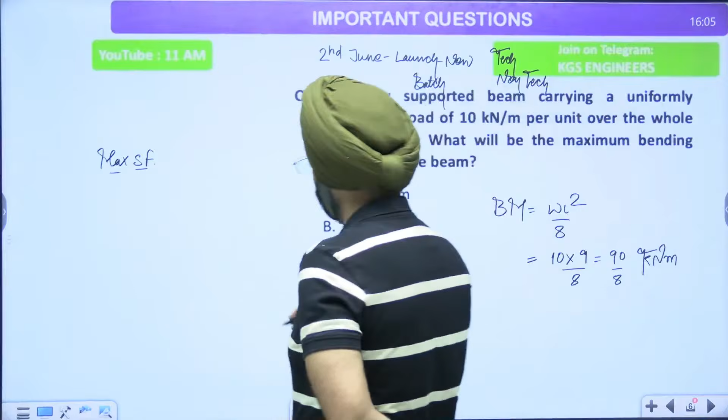Now the maximum shear force for this case will be WL by 2. So W is 10, L is 3, by 2. So this value is 15 kilonewton.

What will be the Euler buckling load of a column when it is fixed at one end and the other end is free? The main thing is effective length - when one end is fixed and other is free, it is 2L. So Euler's load will be pi square EI upon 4L square.

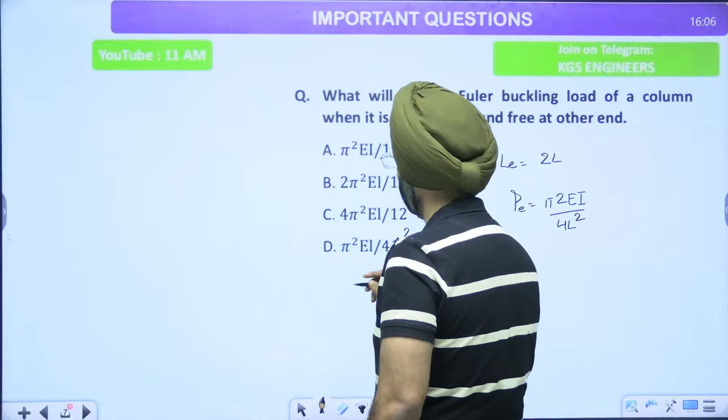These are all L square. Okay, can anyone give me the value of Rankine's constant? Small a, this equals to sigma c divided by what? Can anyone give me the value of Rankine's constant? This is sigma c divided by what?

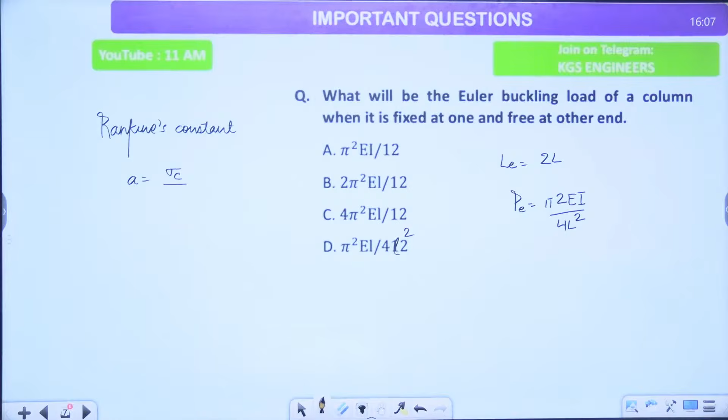This question has been asked several times in various competitive exams - Rankine's constant. Sigma c upon pi square E, nothing else.

As I can see, very few students know the answer of this question. So let me solve this for you, because this question is an important one and regularly asked in competitive exams. So 1 upon Rankine load is 1 upon PC plus 1 upon PE. So Rankine load is PC into PE, PC plus PE. So Rankine load is PCPE upon PC plus PE.

Now divide this value by PE. So this is PC upon 1 plus PC upon PE. Now PC is sigma C into A - crushing load is crushing strength into area. 1 plus sigma C into A. PE is pi square EI upon LE square.

So this is sigma C into A, 1 plus sigma C into A, pi square E. In place of I, I am writing down AK square upon LE square. Now this sigma C upon pi square E, this is Rankine's constant. So Rankine's constant is sigma C upon pi square E.

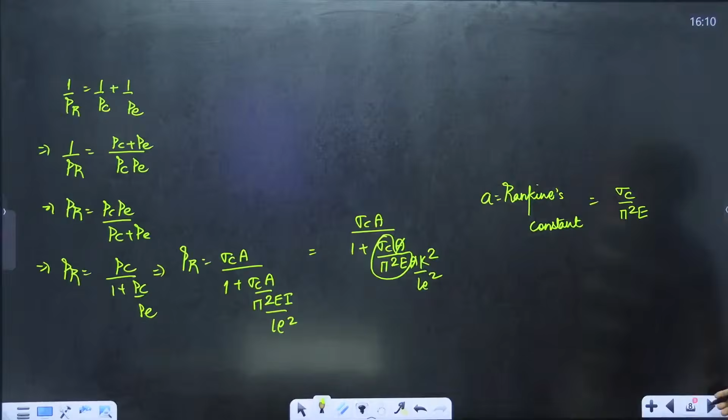Moving on to the next question, let's shuffle the questions. The depth of flow of water at a certain section of a rectangular channel 4 meters wide is 0.5. The discharge through the channel is 16 meter cube per second. If a hydraulic jump takes place on the downstream side, find the depth of flow after the jump. So they have asked you about Y2.

Very interesting question. The depth of flow is given before the jump. What is the depth of flow after the jump? Very interesting question. If you are able to solve this one, it will 100% help you.

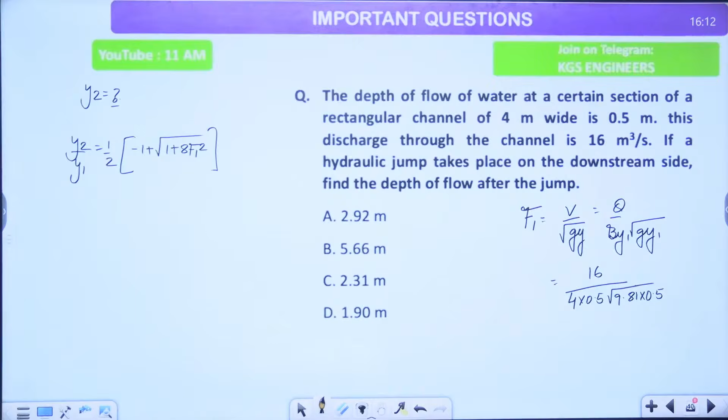So this is under root of 9.81 into 0.5, and 16 by 4 by 0.5. So the Froude number is 3.612. Now put this value here. So Y2, Y1 is 0.5, the square of this value multiplied by 8, plus 1, root of this value minus 1, divided by 2, and then multiplied by 0.5. The answer is 2.316.

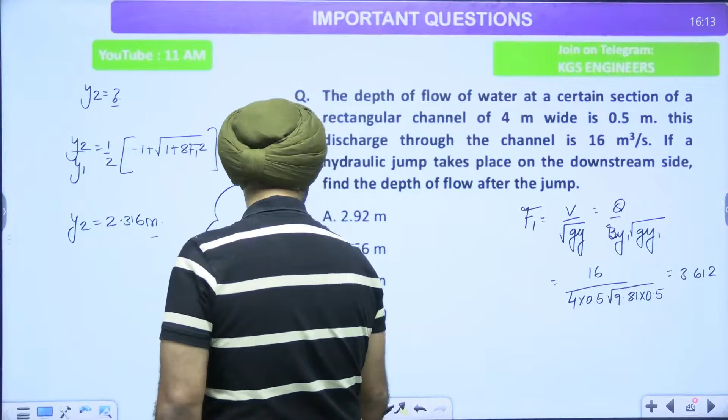Very, very, very interesting question. Definitely deserves appreciation. How was the question, kids? Liked the concept, or I should say loved the concept. A pure conceptual question.

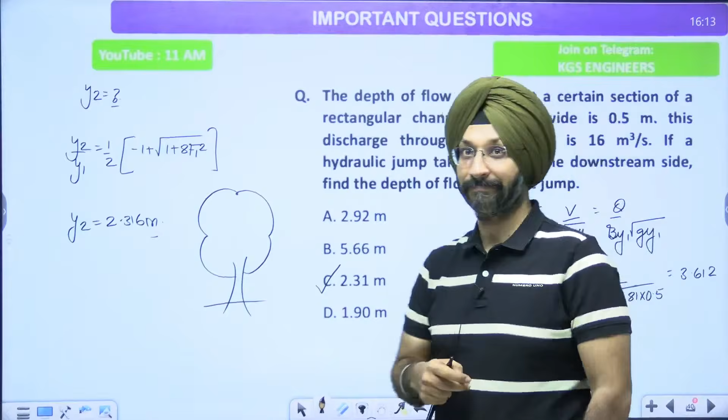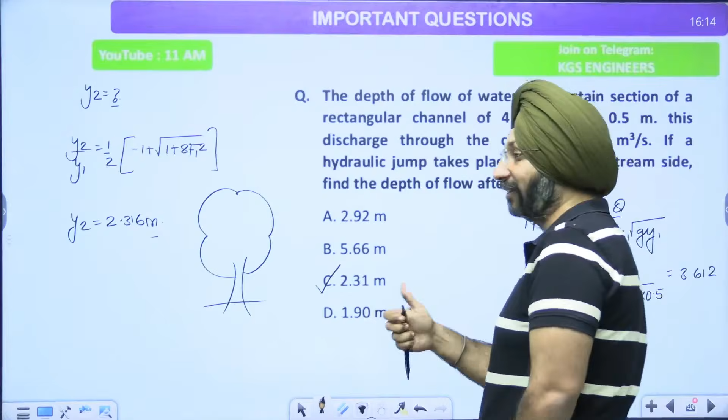The thing you should understand is that the theory of open channel flow is easy. It is among the smallest subjects. If you see the number of chapters, the number of topics in open channel flow, it is among the smallest subjects, but it can have questions as interesting as this one. So it's a very interesting subject.

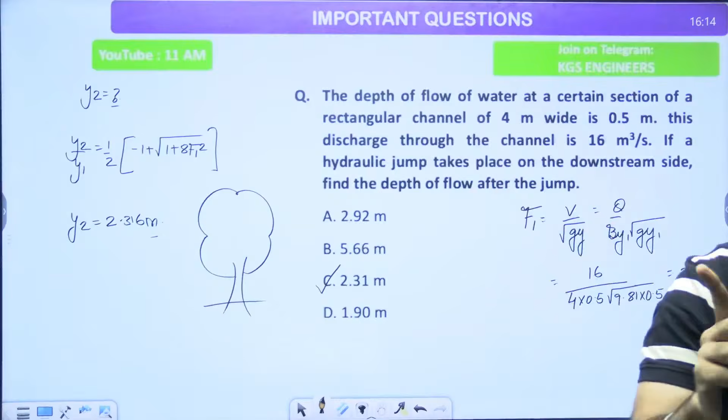We know this: in case of hydraulic jump, there are only 4 formulas. The entire hydraulic jump concept is based on 4 formulas. One I have written here. Another one is y2 minus y1 whole cube divided by 4 times y1 y2. The other one is y1 y2 into y1 plus y2 equals to 2q square upon g. So the entire topic is based on these formulas.

You must have also known that some of these formulas will be applied, but the thing is to apply them. Now how do you become better in solving numericals? It is practice. There is no other way to get better apart from practice.

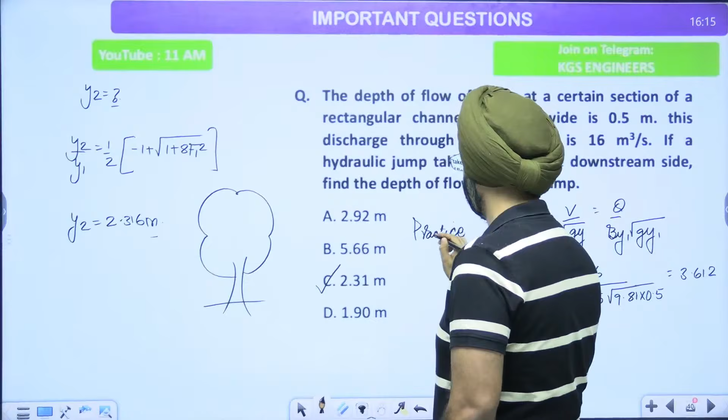Now let's say someone among you tried to solve this numerical and was unable to do so. This is not something to be disheartened about. Don't think that without giving the practice you would be able to solve the numerical. Think of it in a very simple way: you are trying to be a good batsman. Without practicing in the nets, you go straight forward to the match, and now you are thinking that once the bowler throws the ball at you, you will just fling your bat and be able to cover a six or something. That's not possible. That's called a fluke.

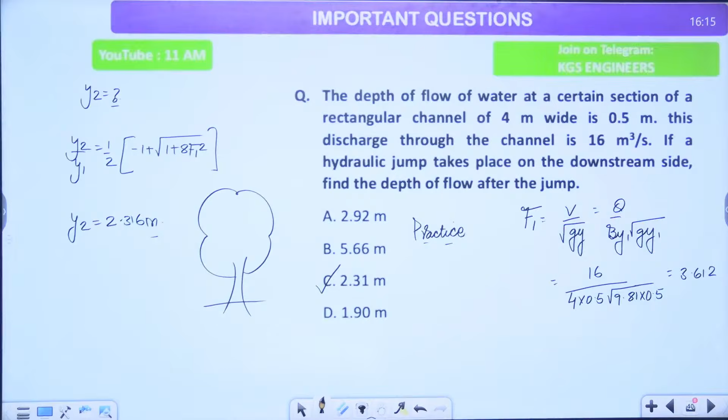So in order to solve such numericals, you need to practice first. A rain gauge which is non-automatic type, which is used by the Meteorological Department of Government of India, which one is this? Oh, this one is easy. This is Symons' rain gauge.

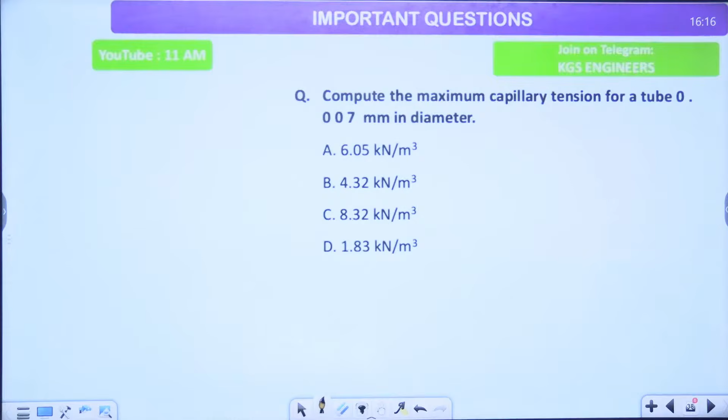Once you see the question, the calculations should immediately start in your brain. You need to increase your brain activity. The moment you see a question, your calculation should become like a supercomputer.

The sum of suction head and delivery head is known as what? The sum of suction head and delivery head is known as what?

This is known as static head.

A few days back, I gave you a code in order to understand a certain equation. My question to you is, in Reynolds equation, which force do you ignore? Let's see how many of you remember this.

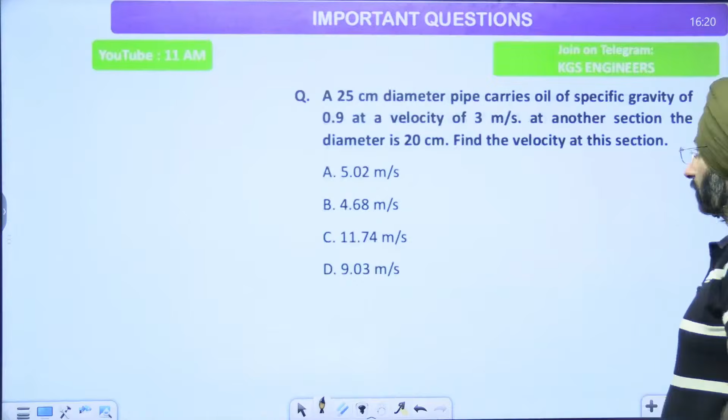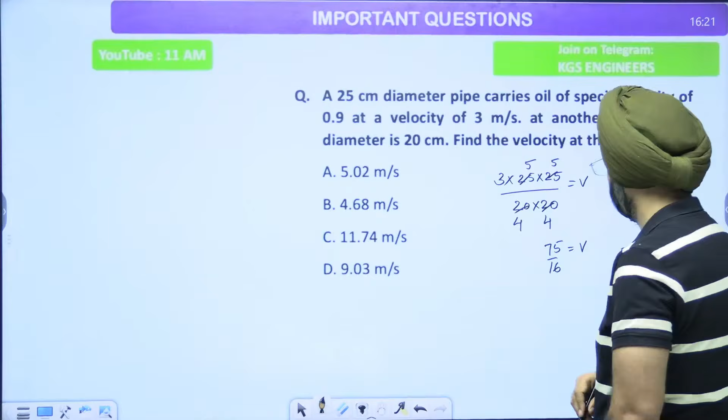Extremely easy question.

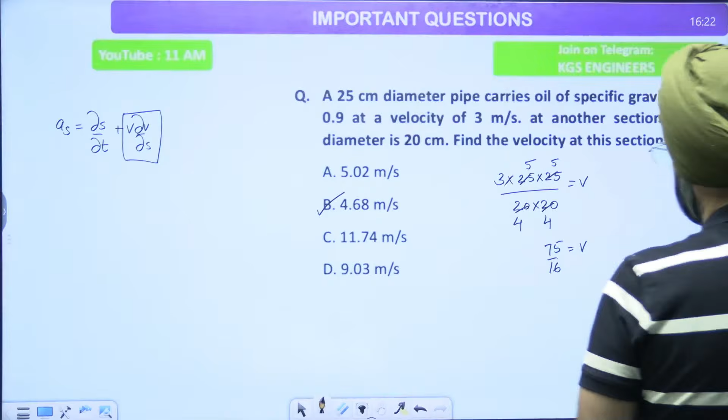Which type of acceleration is this one? Which type of acceleration have I shown in the block? This is convective acceleration.

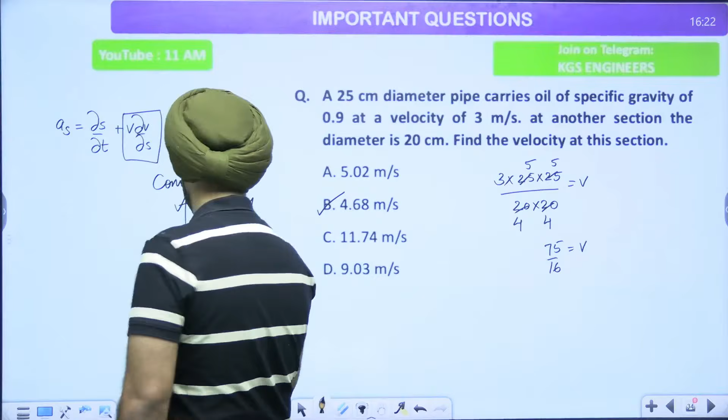My question to you is, when this value is 0, for which case is convective acceleration 0? Which type of flow? Very good.

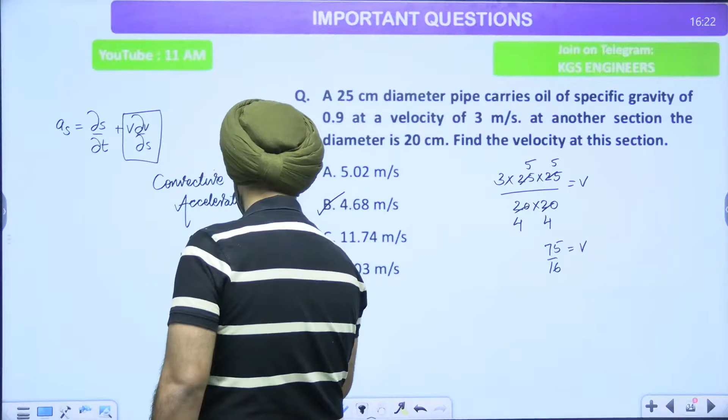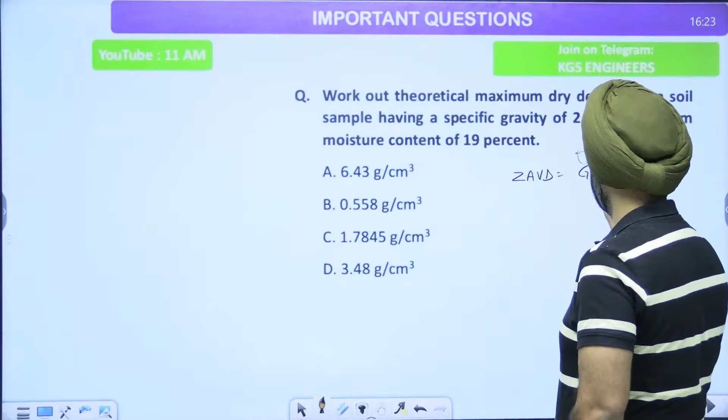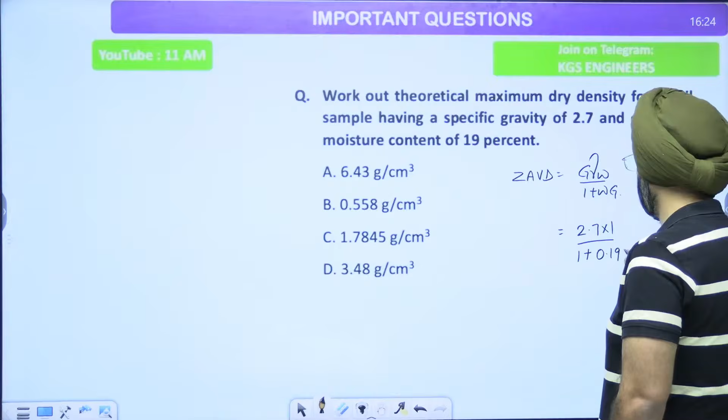Work out the theoretical maximum dry density for a soil sample having a specific gravity and optimum moisture content given. Bachcho, they have asked you the theoretical maximum dry density, meaning they have asked you ZAVD. This is G gamma W upon 1 plus WG, because in case of ZAVD, the degree of saturation is 100%. So G is 2.7, gamma W is 1 because all the data is in gram per centimeter cube. Water content is 0.19, G is 2.7.

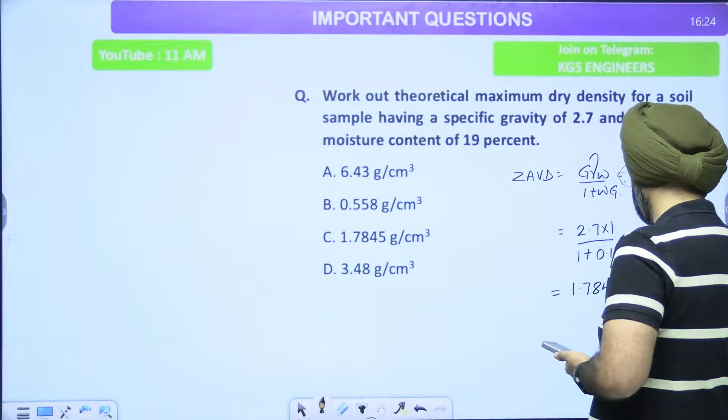A few days back, I asked you the examples of Newtonian fluid. Can you just name me two examples of Newtonian fluids? Yes, this is water and alcohol.

So thixotropic, rheopectic - I hope you know everything about time dependent, time independent fluids.

The allowable maximum settlement for commercial building is what? Now this is an entirely code-based question. If you have read the code, you will be able to answer this one easily. The allowable maximum settlement for commercial building is what?

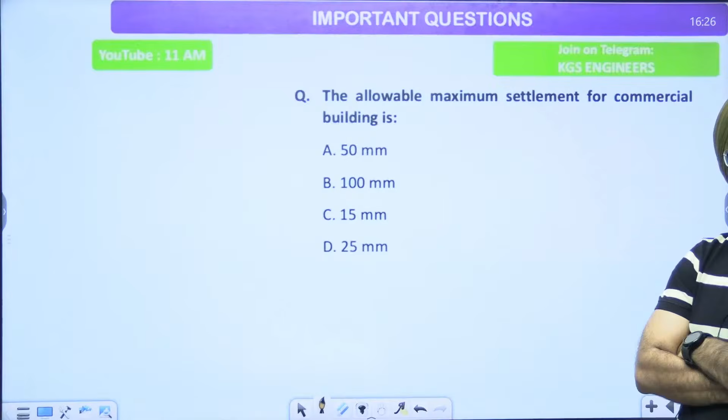As they have not asked which type of soil it is, we will go with the assumption that it might be a case of differential settlement. We'll go with 25 mm. The question should have been framed a bit more clearly, but with the given options, we'll go with option D.

Determine the value of critical hydraulic gradient for a loose deposit of sand having a given void ratio and specific gravity. So this is G minus 1 upon 1 plus E, option D.

Now a very interesting question. Let's see how many of you are able to solve this one. So we have a stream tube. At the beginning of the stream tube, the velocity is 2.5 meter per second, and at the end it is 3.5 meter per second.

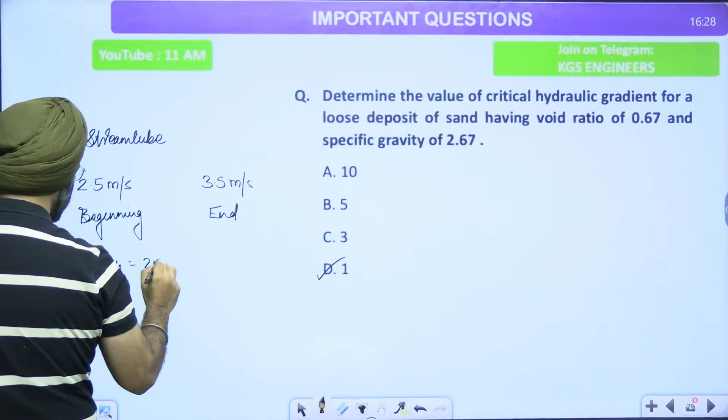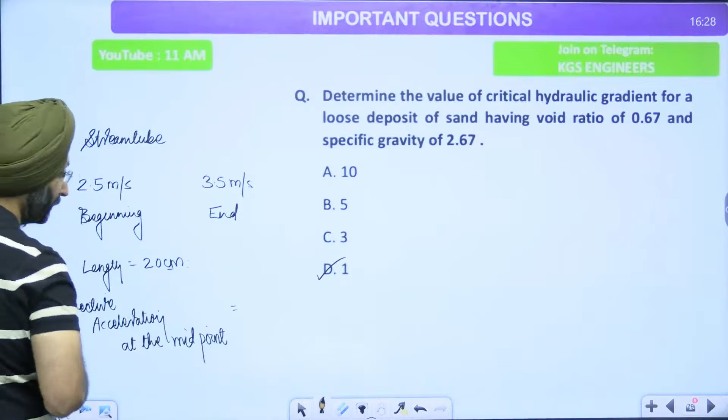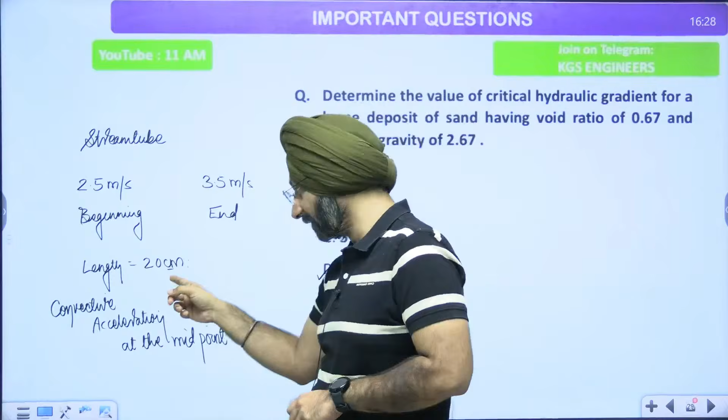The length of the stream tube is 20 centimeter. Find out the convective acceleration at the midpoint of the stream tube. This question has been asked in JE, AE, ESE exams. So in the beginning of the stream tube, velocity is 2.5 meter per second, at the end it is 3.5 meter per second, and length is 20 centimeter. What is the convective acceleration at the midpoint?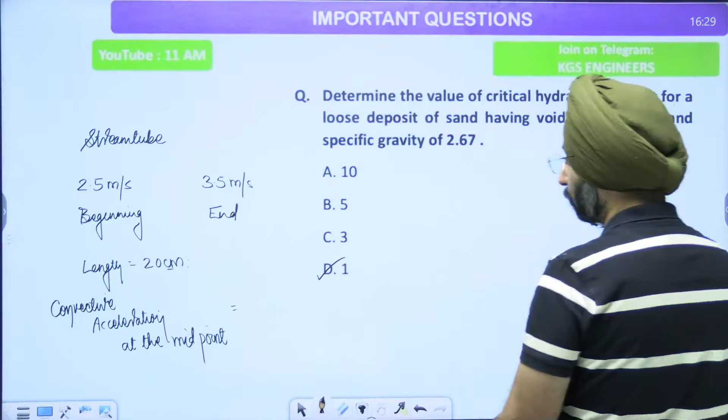If you are able to solve this question, I assure you that you will be able to clear any competitive exam related to civil engineering, because this question will only be solved by students who have really put in the effort. Those who have just crammed notes throughout, they won't be able to solve this one. First of all, mere bachche, the unit of convective acceleration should not be meter per second.

Now, what is convective acceleration? This is V, del V by del X. Del V is change in velocity, which is 3.5 minus 2.5. Del X is the length: 0.2 meter, multiplied by velocity. Velocity where? At the midpoint, because you need to find the convective acceleration at the midpoint.

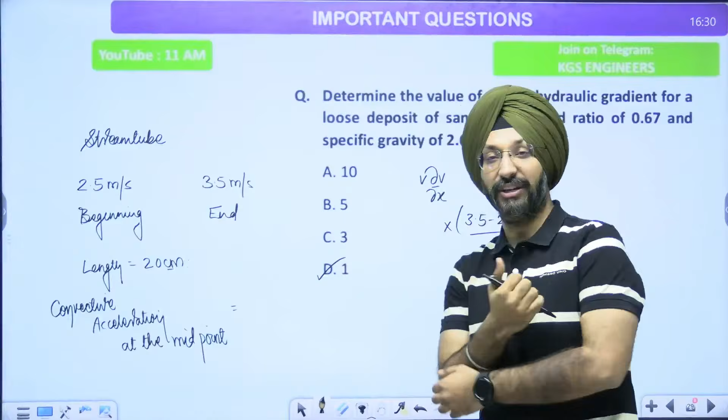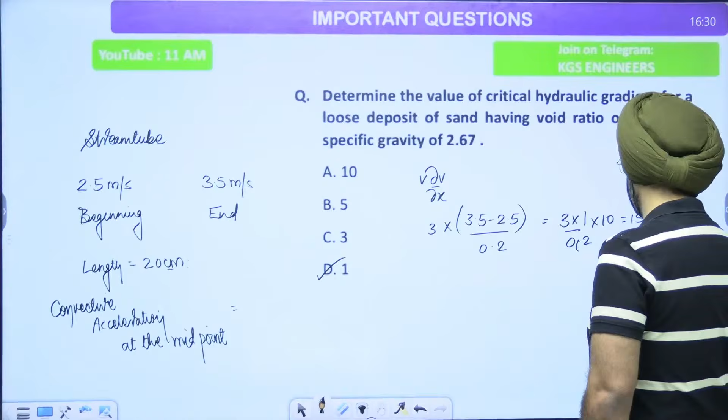Now, what is the velocity at midpoint? Take the average of 2.5 and 3.5: 2.5 plus 3.5 is 6, divided by 2, so this should be 3. So this should be 3 into 1 divided by 0.2, giving 15 meter per second square. But you got the value correct, Obito, so very good.

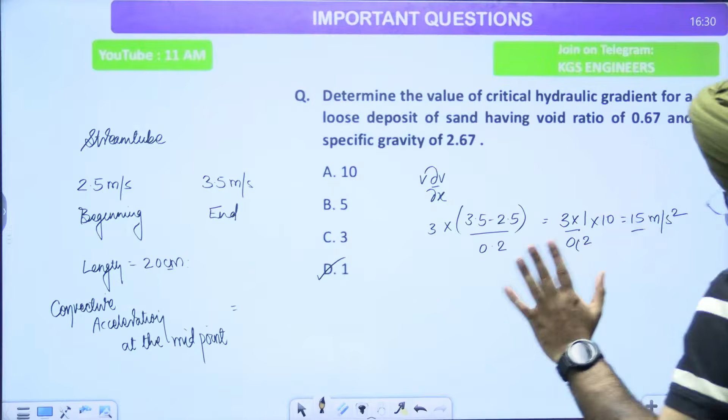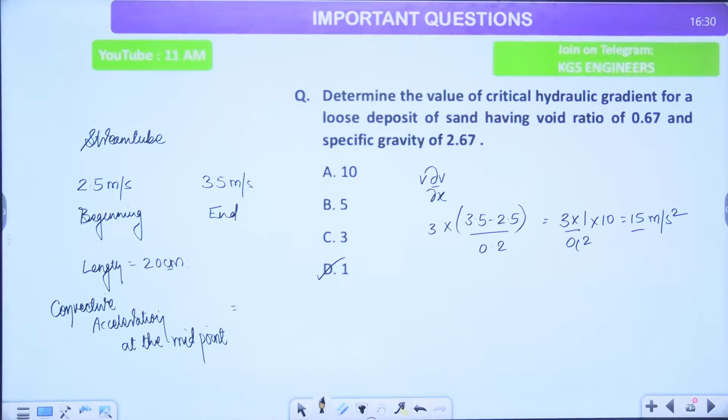Good evening. So though you got the SI unit wrong, you got the concept correct, so I will give you marks. And I can assure you this, that if you continue on this path, you will have the job, you will have the career you want.

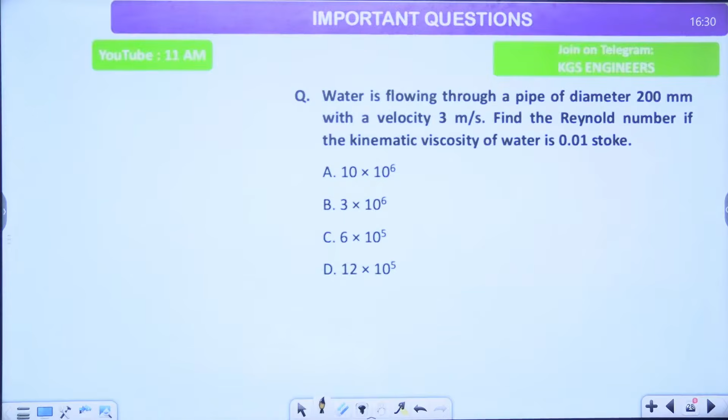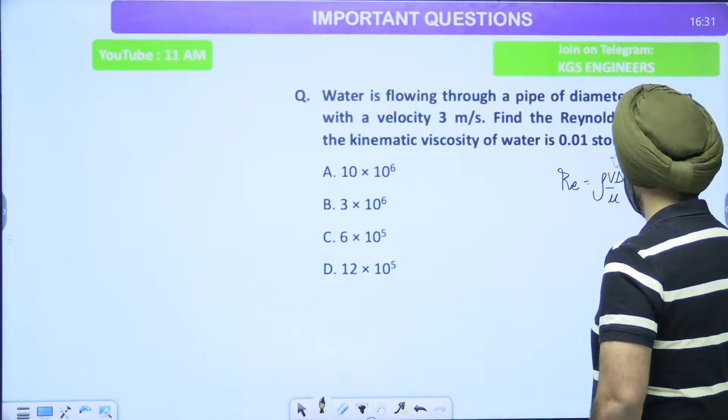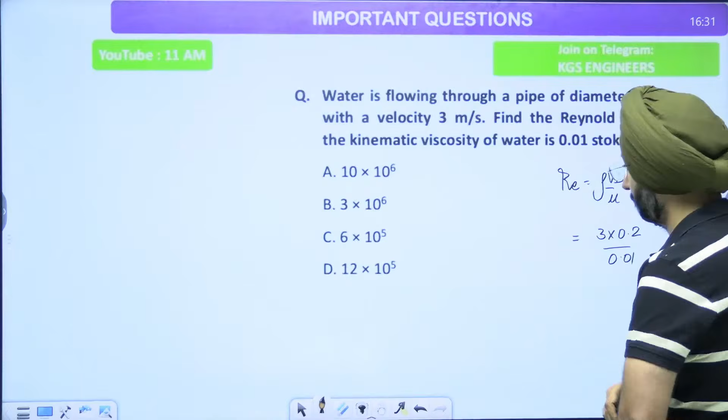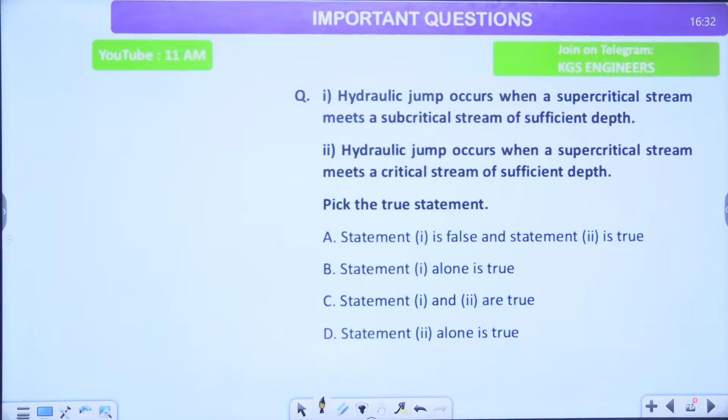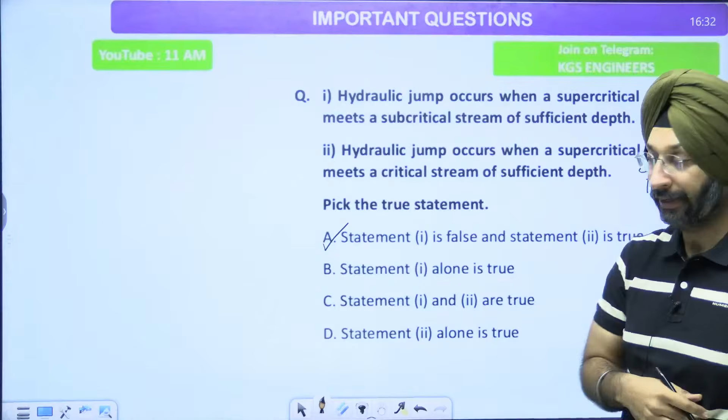A hydraulic jump occurs when a supercritical stream meets a subcritical stream. So statement first is true, second is false. Answer is option A. One more question is that hydraulic jump occurs when a steep slope meets a mild slope.

A pitot static tube is used to measure the velocity of water in a pipe. The stagnation pressure head is this, static pressure head is this. Calculate the velocity of flow, assuming the coefficient of velocity is 0.98.

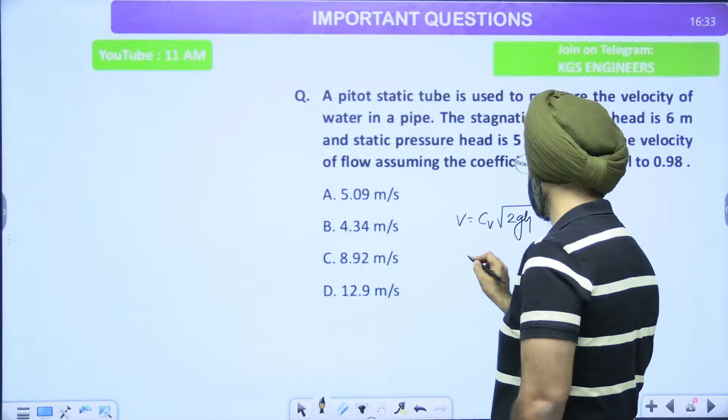Now here the velocity will be Cv under root 2GH. This value is 0.98, G is 9.81, net head is 1. So the answer is 4.34 meter per second.

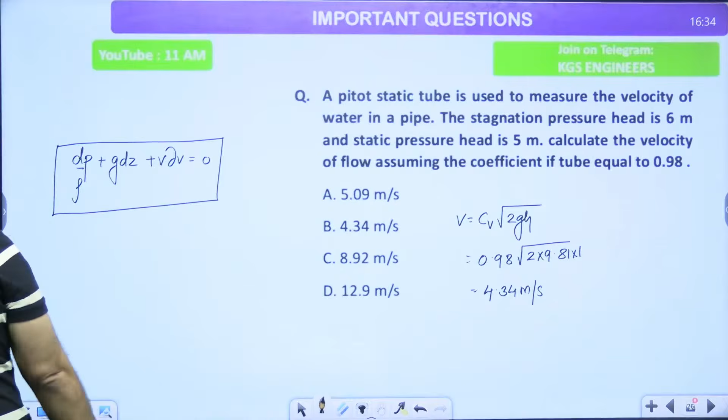Just tell me: dP upon rho, plus G dz, plus V del V, is equals to 0. Which equation is this? Which equation is this? Very good, this is the Euler's equation.

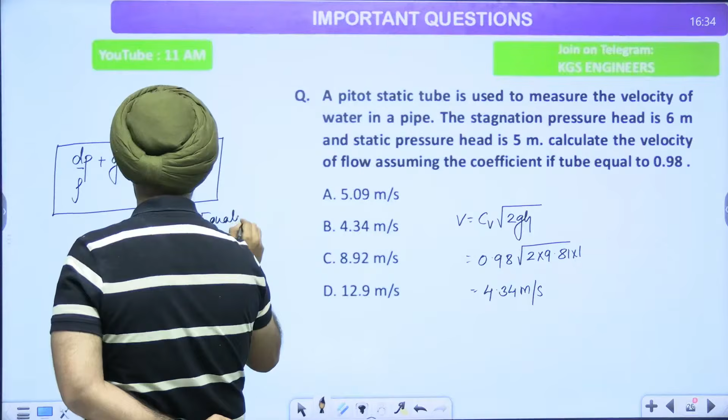Very good. Now, in order to get Bernoulli's equation from Euler's equation, what do I need to do? Very good. So if I integrate the Euler's equation, I get Bernoulli's equation.

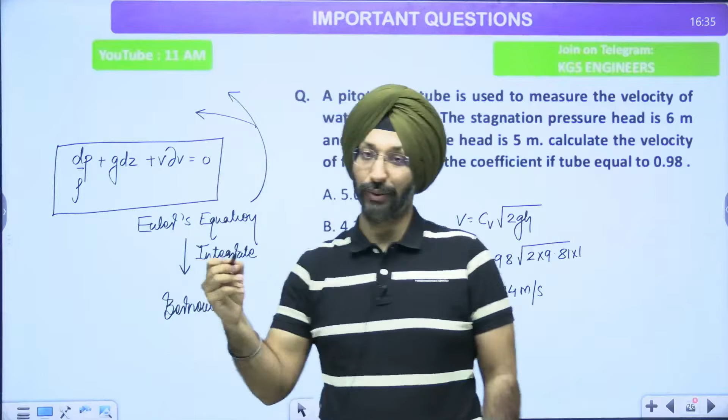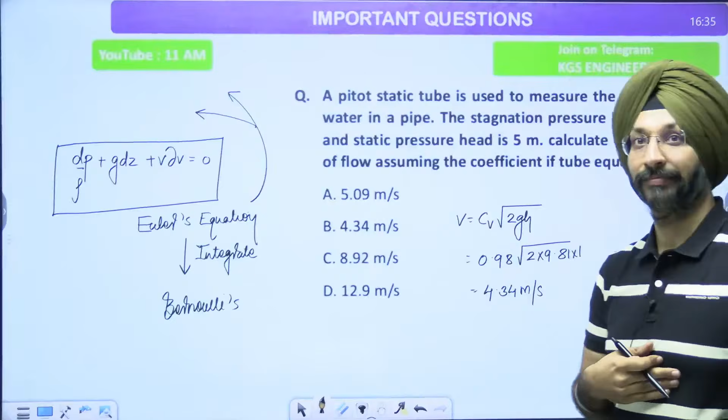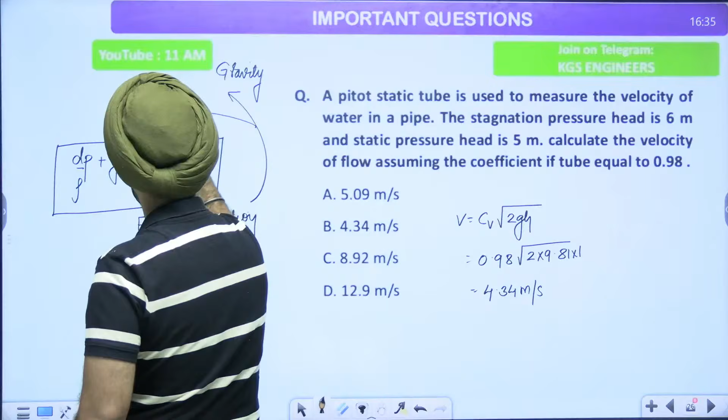One more question: which forces do we consider in Euler's equation? Which forces do we consider in Euler's equation? We consider gravity force and pressure force.

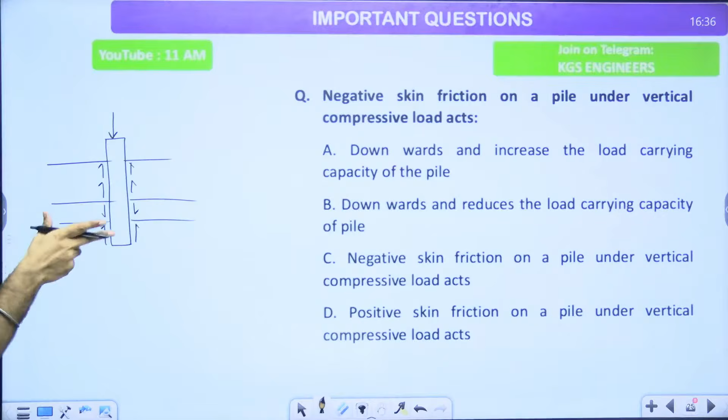If you know the diagrammatic representation of negative skin friction, then you can easily solve this question. So this is the load. Actually, the skin friction acts in the direction opposite to the load, but in case of negative skin friction, it acts in the direction of the loading. So it acts downwards and reduces the load carrying capacity of the pile.

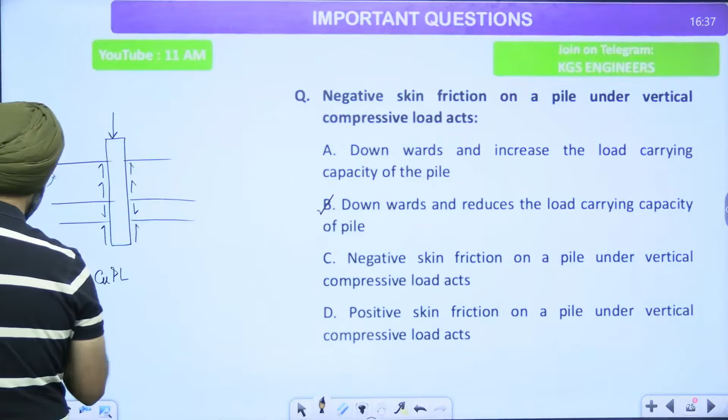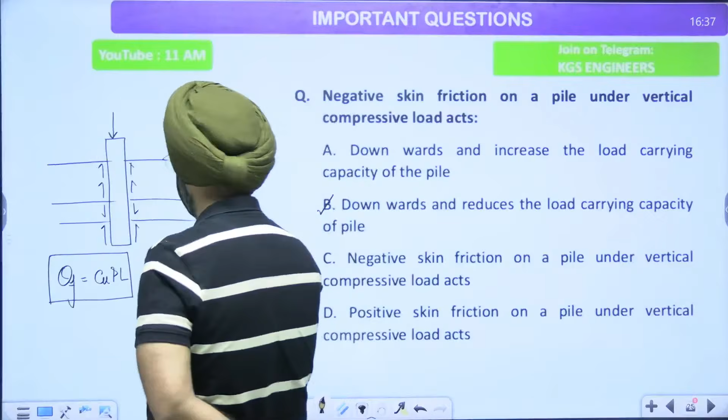Have I written the correct expression for negative skin friction in cohesive soils? Is this the value of negative skin friction in cohesive soils?

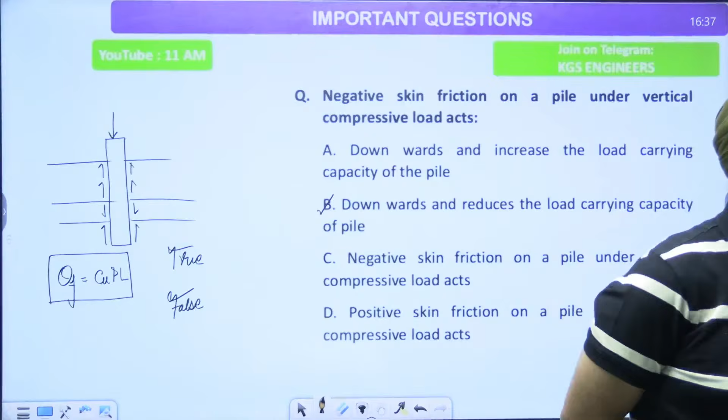Children, please keep this in your mind that the expression of negative skin friction is also asked in competitive exams. Let's represent it as Q dash.

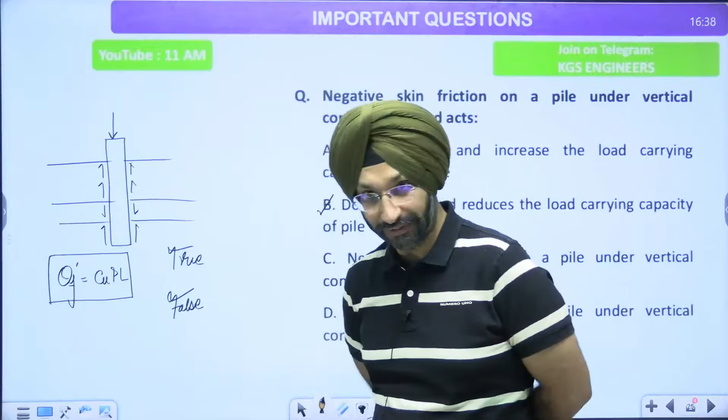So dear children, what is the expression for QF? It is FSAS. Now, Fs is alpha Cu. Surface area of the pile is perimeter into length. Just remember it this way, that in case of negative skin friction, we put this alpha as 1. So this is the correct expression: Cu P L. Cu is undrained cohesive strength, P is perimeter, and L is embedded length.

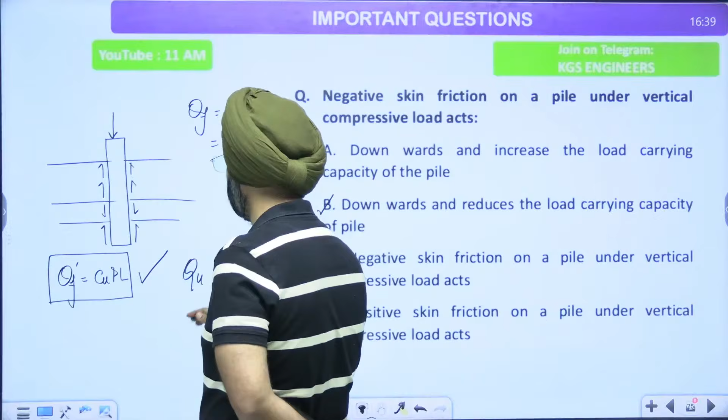So the actual load carrying capacity, this QF, this Q dash F, is this value. So the load carrying capacity of the pile reduces.

The dimensional quantity for angular velocity is what? Extremely easy, what is the dimension of angular velocity?

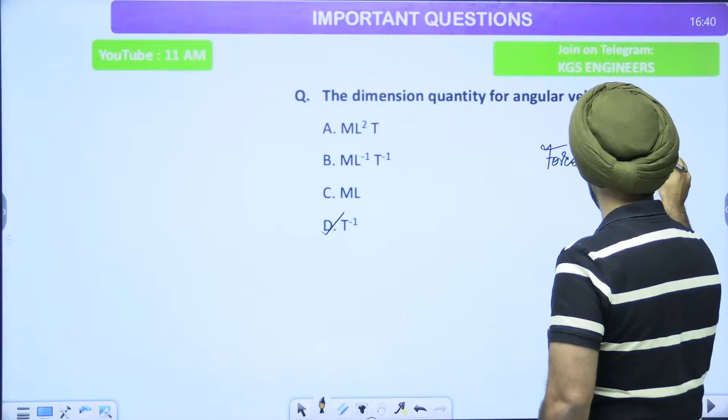Now, you have answered the question extremely well. My question is, in case of forced vortex flow, what is the relation between velocity and radius? What is the value of n? Is it 1? Is it 2? Is it -1, meaning inversely proportional, or is it -2? In case of forced vortex flow, please make sure you are hearing me correctly, not free, what is the relation between velocity and radius?

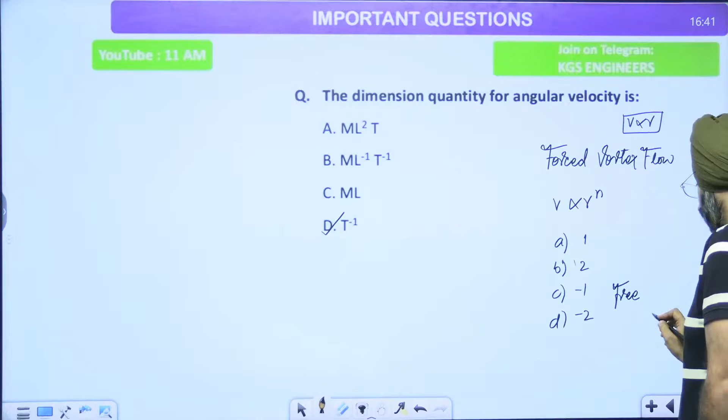Good. In case of forced vortex flow, velocity is directly proportional to the radius, whereas in case of free vortex flow, velocity is inversely proportional to radius. Mode of failure in a very deep footing in dense sand is which one?

Mode of failure in a very deep footing in dense sand is which one? Punching shear failure. Very good.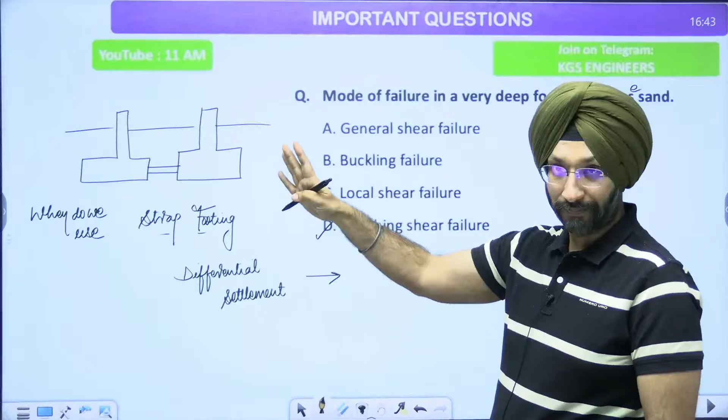Just a simple question. Can you give me an example of a very famous structure which has undergone differential settlement, meaning unequal settlement?

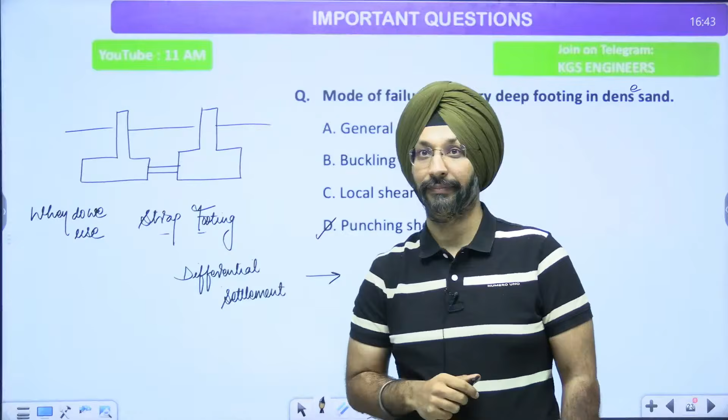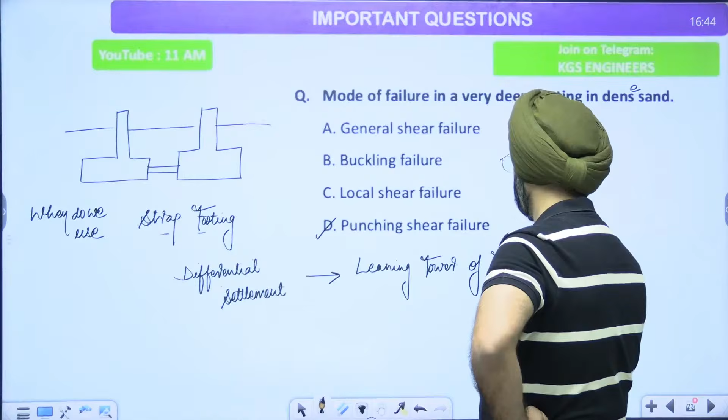Pizza. It is not pizza, it sounds like pizza, but it is the Leaning Tower of Pisa. Pisa is a city in Italy. I am sure you must have seen that image where the building has shown differential settlement, unequal settlement, and due to this unequal settlement, the building has tilted.

And in fact, when the building was in the middle of its construction, it was already showing signs of differential settlement. But the engineers at that time still kept constructing it, this building is extremely old, hundreds of years old. So though they found out it was already undergoing differential settlement, they kept constructing it. In a way, this is a very infamous example of engineering.